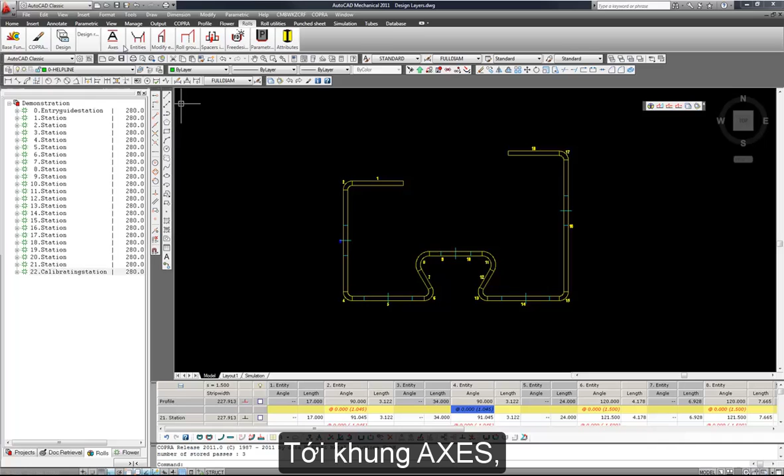Once this is loaded, the first thing we will create is our axes for our top and bottom rolls. This is done by going to Axes, then Axes Automatical.

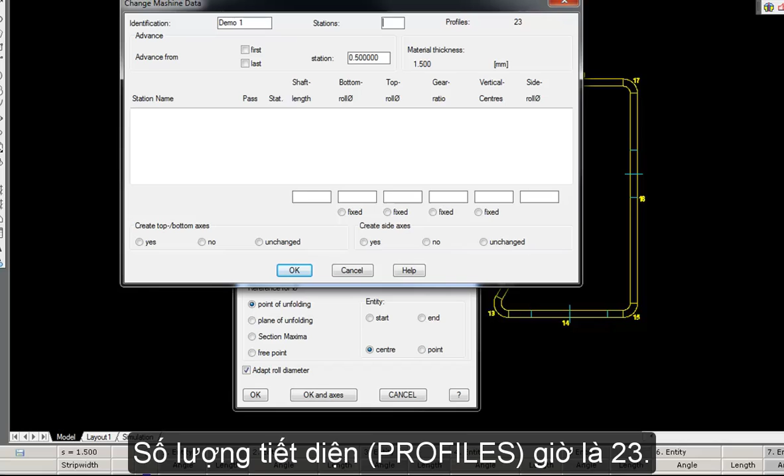Once this is loaded, we can go to Create, and here we can create a machine. We need to specify how many profiles we will have.

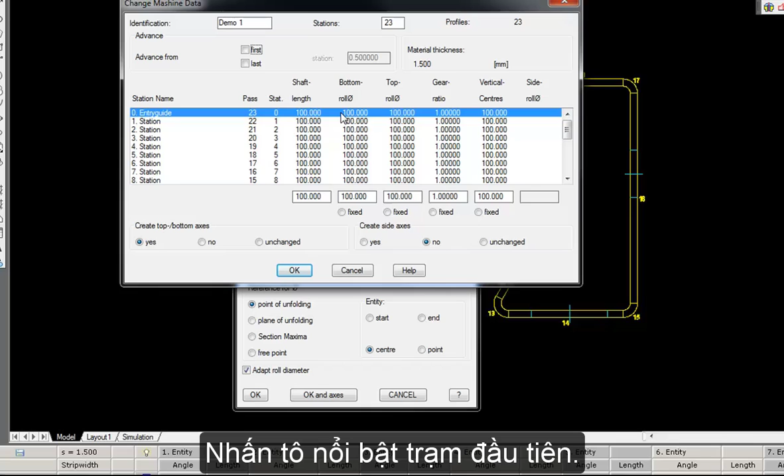For us, we will have 23 stations. We're not going to create any side rolls, so we'll leave the radio button here, but we are going to create top and bottom. I'll highlight the first, scroll down with my wheel mouse, hold down Shift, then select the last to highlight all of our axes.

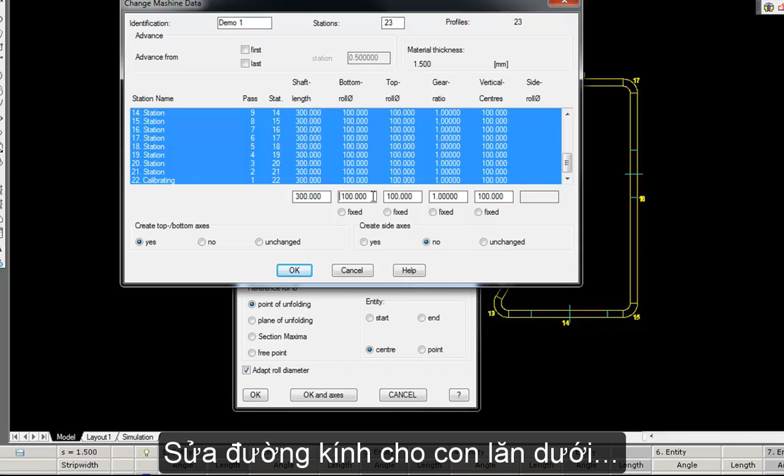The shaft length I would like is 300 millimeters, and the drive diameter for this demonstration I'm going to go with 150.

We can leave this fixed now and change our vertical centers over here to 176.5. This will give us a calculated top roll diameter of 200 millimeters.

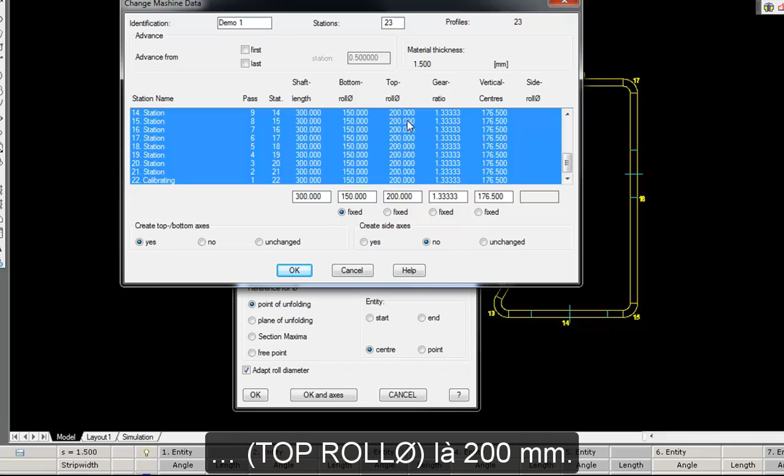We can of course change these later as we begin to design our rolls.

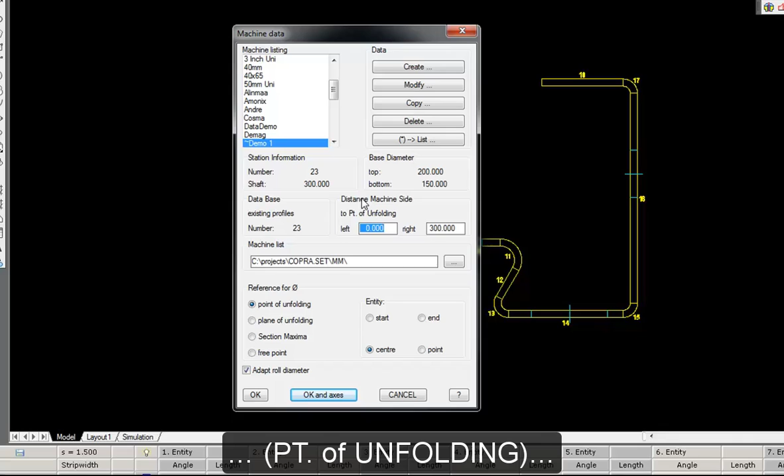Let us now click OK, and now we specify the distance to the point of unfolding of our profile. I would like it to be in the center of my shaft.

I can now go OK and Axes, and you'll see my axes are drawn. I can now create an archive file and call it Rolls.

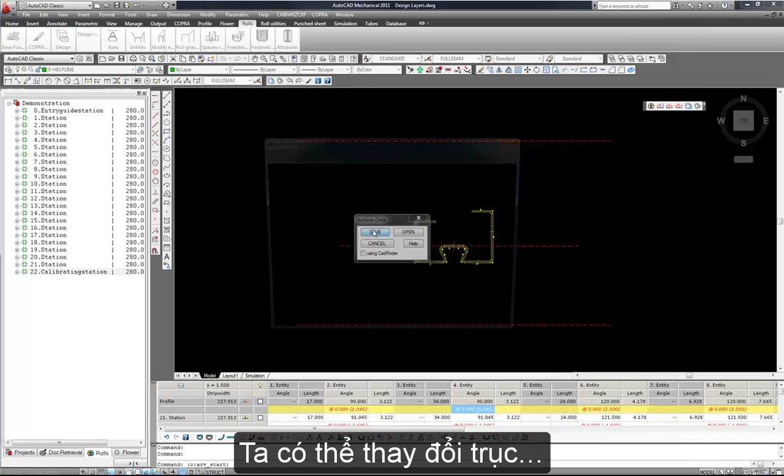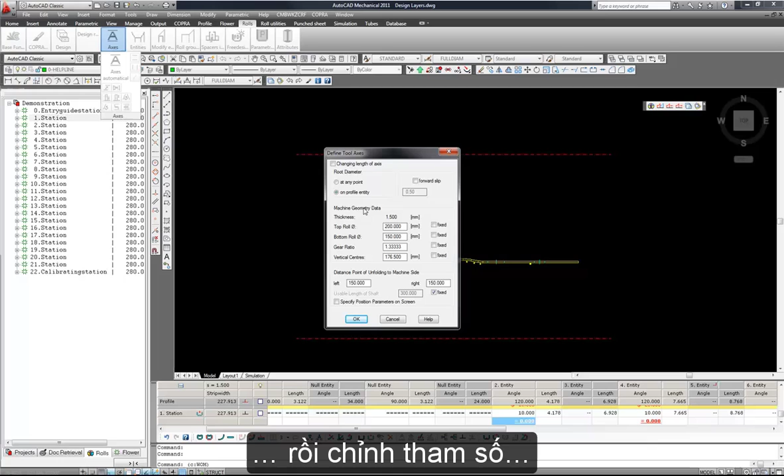We have the possibility in each station to change our axes if we wanted to reduce them, by going here to Axes Top and Bottom. We can then re-specify our top roll diameter, our bottom roll diameter.

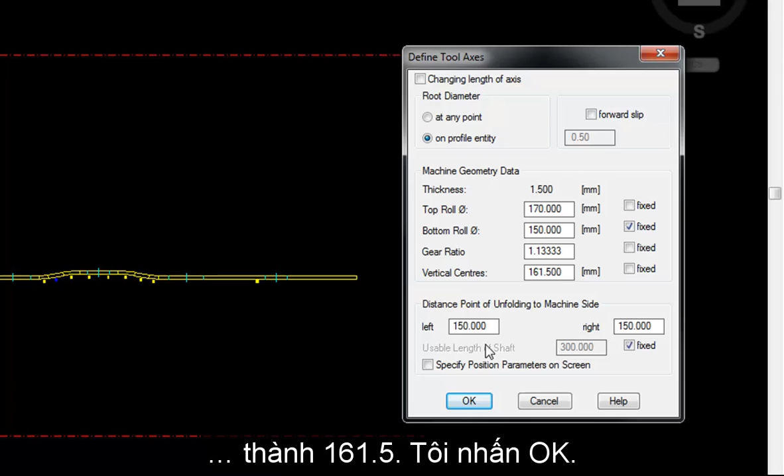So for example, now I want to fix the bottom roll and I will change the top roll diameter to make it much smaller, to 170. The vertical centers will be calculated automatically and I can click OK.

I'm then asked to pick the profile entity lying on the driving diameter, and in this example it will be this entity here. You'll see now our vertical centers have been adjusted to the new size.

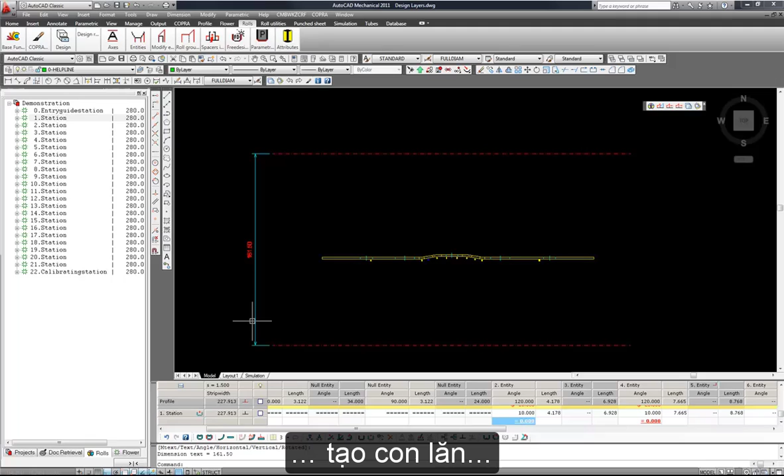Once we've done this, we can begin to create some rolls. In the first example, I'm going to use what we call free design. Free design allows us to use our AutoCAD polylines as our roll structure.

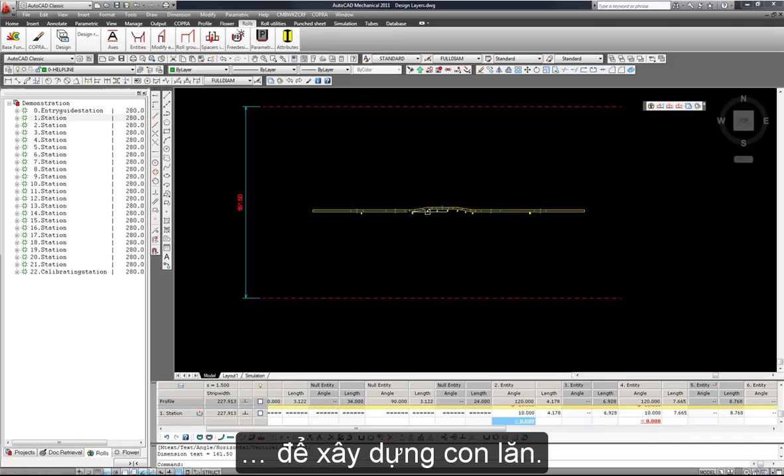So first of all, I will now draw a polyline along the base of our profile. I'm going to use the AutoCAD command PL for polyline, and I will draw from here

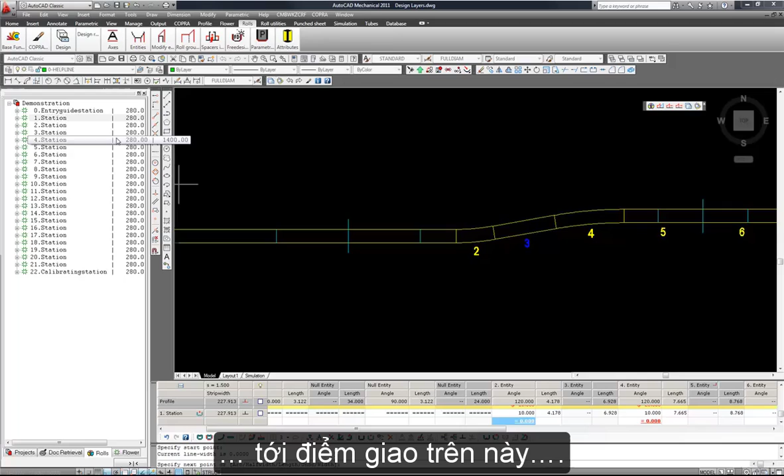to the apparent intersection of here and here, to here, and follow around the contour.

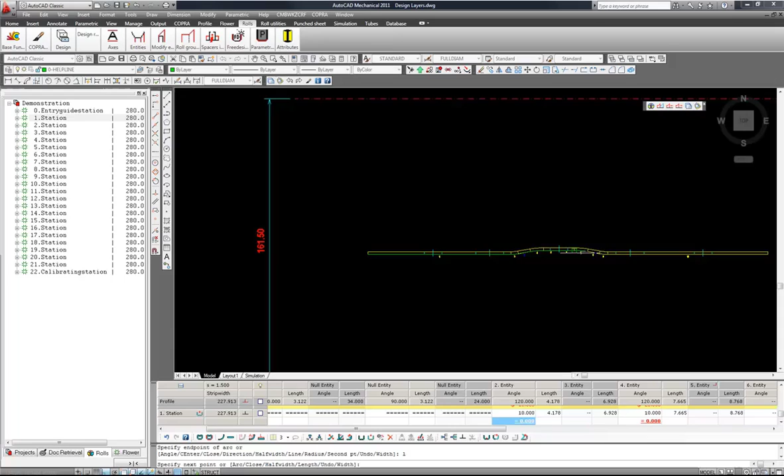Once I have a polyline, I can highlight it. The remainder of my roll construction will now look a little something like this.

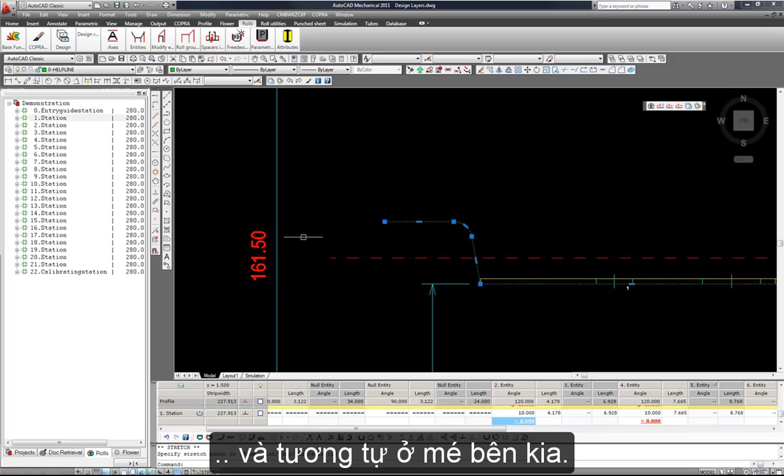And now the same on the opposite side.

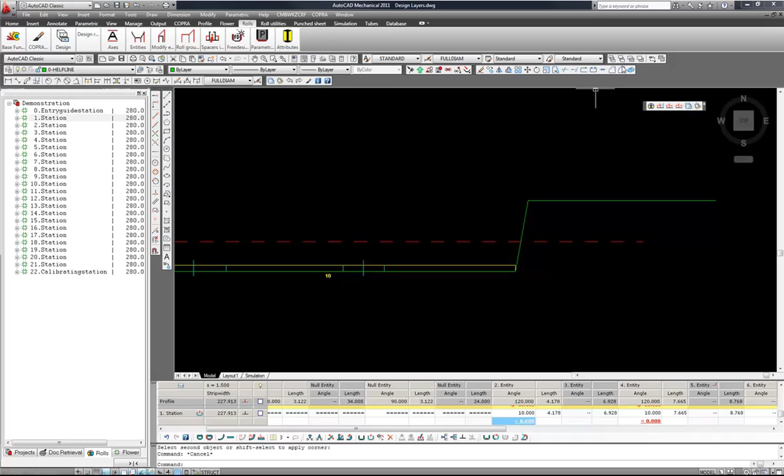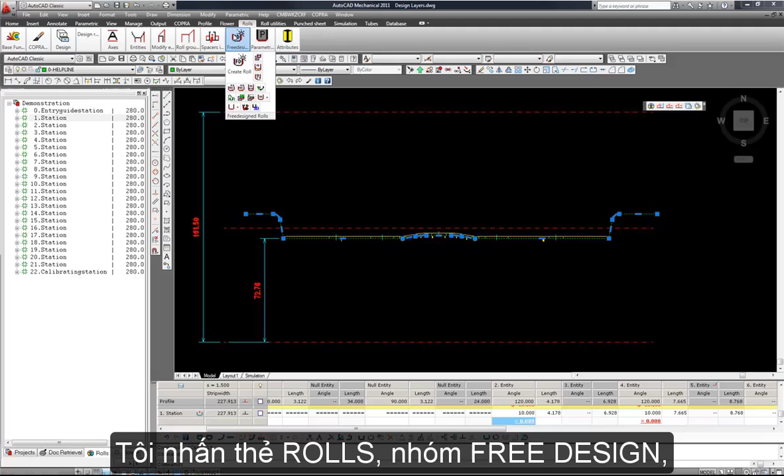You can now see I have the outline contour of my bottom roll. I now go to the Free Design menu here on the Rolls panel, hit Create Roll, and then I select the polyline I've just constructed.

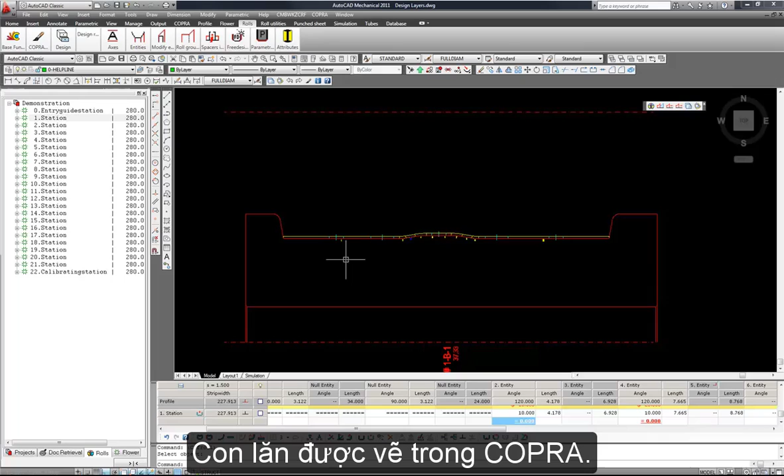I specify that I would like this roll for the bottom, hit OK, and then my roll will be drawn in Copra. To save this to the database, I can hit Save Roll.

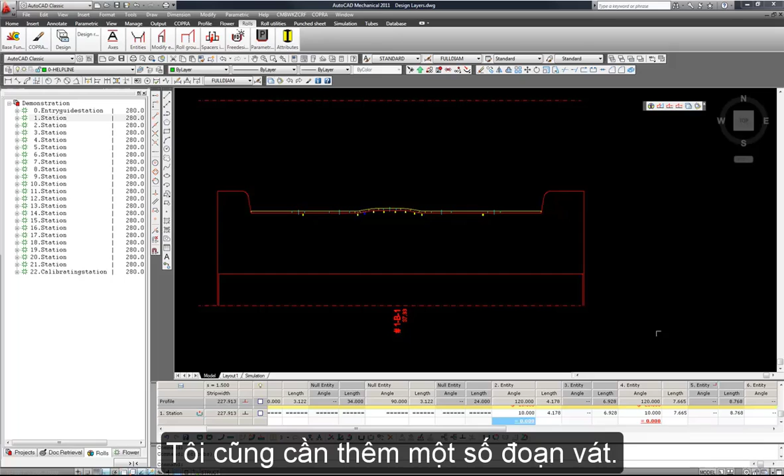Now first of all, I can see my roll can potentially be narrower, and I need to add some chamfers. So we have a few possibilities. First of all, I will use AutoCAD to now stretch the roll and make it 10mm narrower.

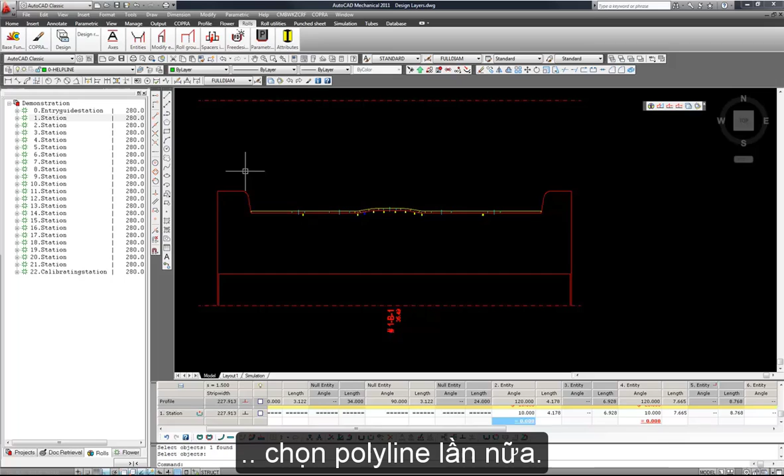I can then go to Free Design and select Save Roll, pick the polyline again, and my roll will be updated in the COPRA database. I would like to add some chamfers here at the end.

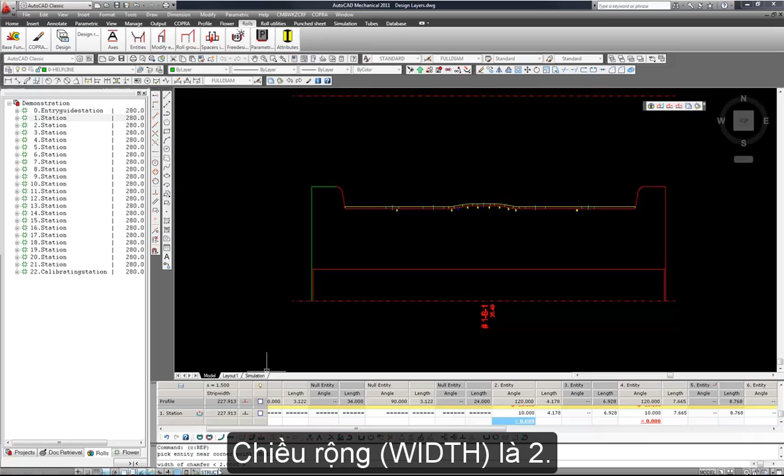So now I can go to Modify Entity, and this is a Copra tool, not an AutoCAD tool. Hit Chamfer, pick the end position here, specify the width, here it is 2, the angle will be 45, and then Copra draws it for me here.

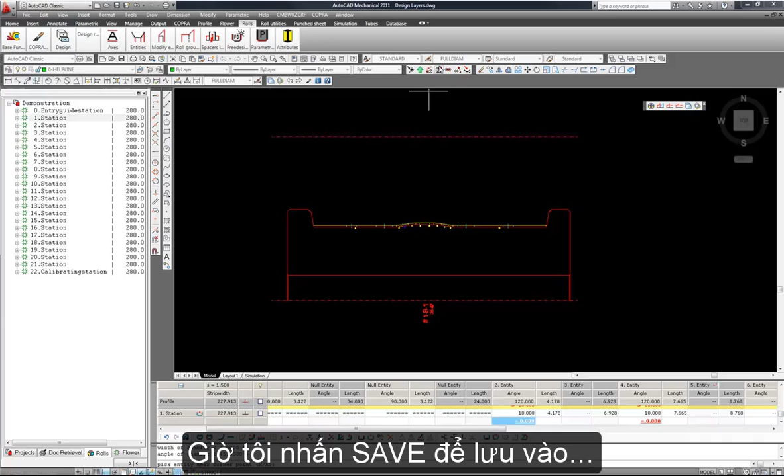Then over on the opposite side, the command is still active, so I'd like to put a chamfer here, 2mm wide by 45, and there we go. I'll now hit Save and store that to the COPRA database.